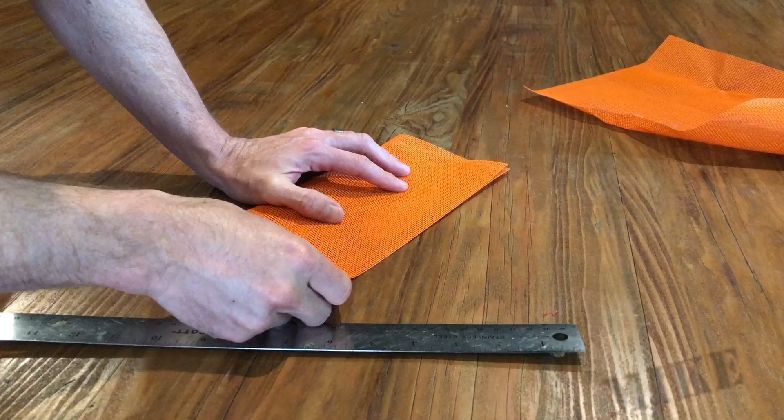These might be small enough, and with that upholstery thread and a dense enough stitch, this just might sew directly without having to put a piece of nylon tape on it. Let me go see. Okay, let's lock it off here. And I'm going to cross into this other stitch to make sure that this corner is nice and dense. And apply a lock stitch here and cut it off.

Oops. All right, that is pretty solid. So now I'm going to turn this sucker inside out, hopefully. Yeah, that's a pretty darn good stitch. Looks nice too. Okay, now the key element, of course, is the closure. What I really don't want to do is have an external stitch, but I'm probably going to have to. I don't see any way around it.

What I'll probably end up doing is folding the bag in on itself, like so, one little bit, so that the edge at least is a rounded edge, like so, and then I will sew all over all 4 layers there. Of course, the thing to do now, though, is I have to figure out exactly where to apply my closure. So I think it's time to fill it with the shot.

So I'm going to go ahead and fill it with shot and see where the shot comes up to. I've got my shot in here. I've got it patted down to the thickness I want, and I would really like it to be 7 inches long. So I'm going to mark here on this piece; this is where I want to close it up. Or where I want to fold it so that it closes. Okay, let's try this.

Okay, so then when I stand it up, you can see my shot only comes up to here, but my closure's here. So I've got plenty of room, hopefully, to sew this thing shut. Now, if I want it to be this long ultimately, my fold has to be at least a ½ inch to get under the presser foot. So I need to cut it about here. So I'm gonna do that.

All right, that folded over pretty well. The stitch is pretty darn thick. I'm not sure how that's gonna work when the needle gets to there, so I'm gonna do that area last. That way I have enough to be able to pull through and do this. Okay, to the sewing machine.

So I've got a little bit of a dilemma. How to keep the shot down near the bottom of the bag while I do this. Ideally, the needle would be right here, you know, so I could just run it along like this, and gravity would be in my favor the whole time. But it isn't. I guess I could pin it. That's what I'll do. I'm gonna run some pins here to make a temporary dam, essentially. I'll be right back. I'm gonna kind of weave them together here so that they don't...

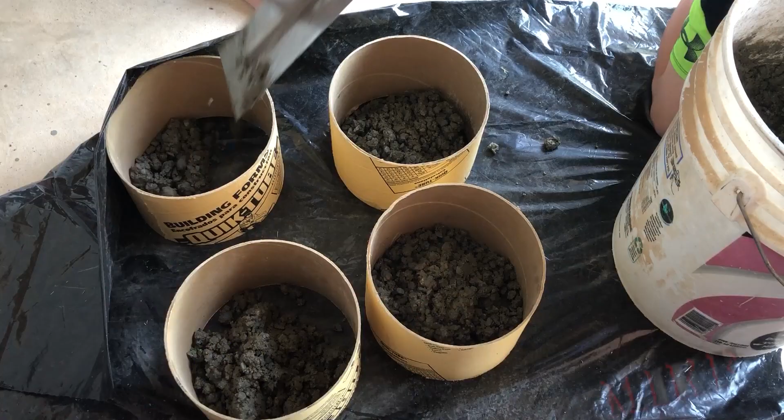And then we fill these forms that we had left over from the swing set footings. We fill them to about halfway. These are 8 inches in diameter. And then once we get them halfway, I tamp it down with this little piece of plywood I had left over. Get in every little nook and corner.

And then with these loops of wire I made, I just crossed them over themselves one time and bent the ends down about 1 inch to keep them from pulling back out of the concrete once it's set. And make sure they're centered here. Yep, this one came loose. So just loop it over itself like so. And the bent ends also keep the wire from coming undone, not only gripping the concrete, so they serve two functions.

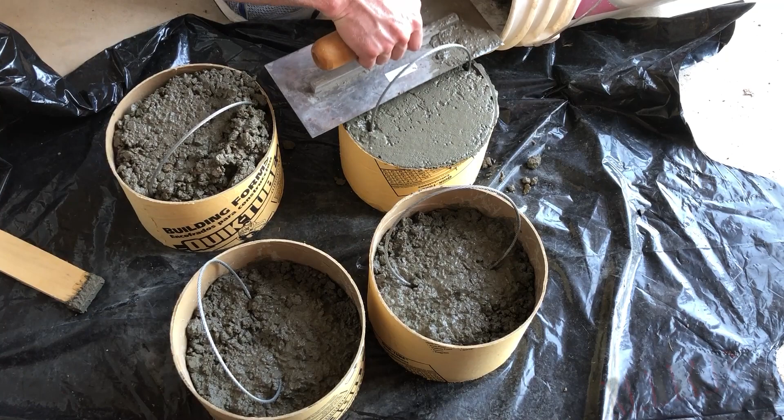And get this last one in there. And then, of course, I'll fill this up and get it all tamped down in here so that these are nice and straight and centered. And then we'll fill the whole thing with concrete. When these are done, each of these is going to weigh right at about 20 pounds. So the 80-pound bag worked out great. And then let them set up.

Still too simple, you say? All right, let's step it up another notch. How about some hard weights? 3-pound weights are kind of my bread and butter. I've got 2s and I've got a bunch of 3s. So let's make some hard weights. It is hard. That's why they're called hard weights. But check this out.

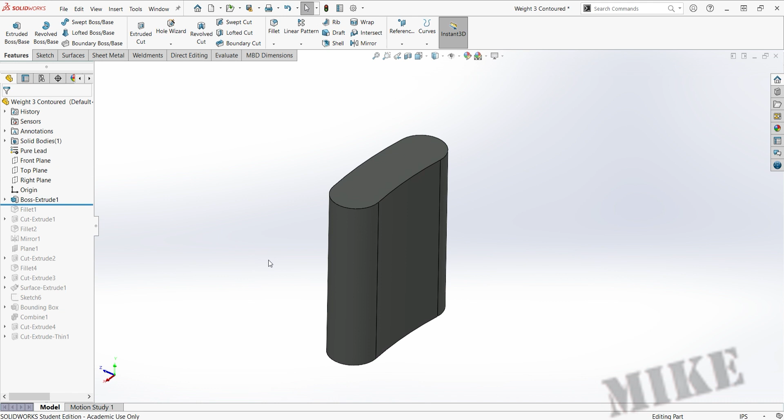So I started in SolidWorks with just this simple extrude. You can see it's just kind of a contoured, slightly concave, convex rectangle. And then I filleted all my corners, like so, make it nice and smooth. And then I did an extruded cut here on the top plane. It's a double convex lens, essentially. And kind of just like so, nothing too fancy. And then filleted that to make it nice and smooth, and mirrored it across here.

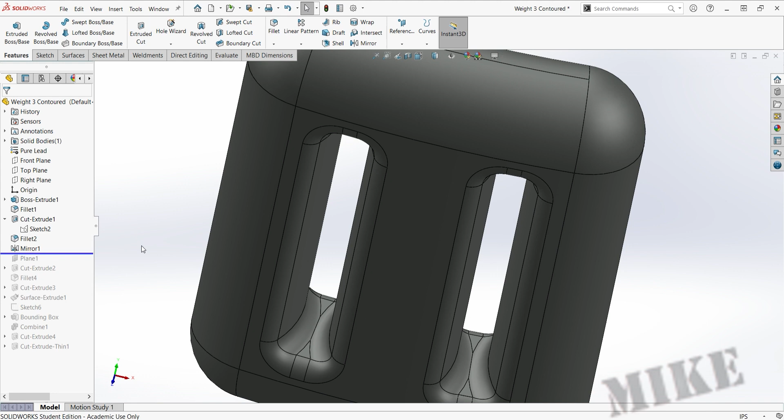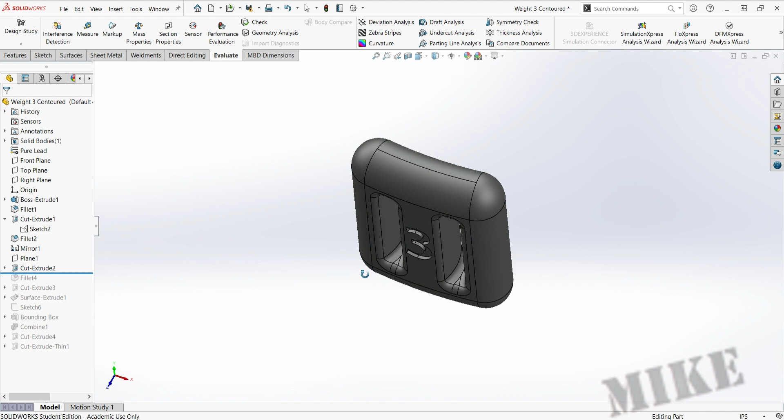And then I just played with the size of these cuts to kind of get my weight right. I went up here and evaluated the mass properties until it said 3 pounds. And of course you can see my material properties here are set to lead. Then I created this plane tangent to the front so that I could cut out this number 3 here, because all weights have their weight stamped into them.

So like so, you can see the number 3 there inset just a little ways. And then I had to fillet those corners to make them nice and smooth. Otherwise, they're not going to cast properly. Cut that little corner off there. It was a little sharp, so I had to cut that little corner in the 3.

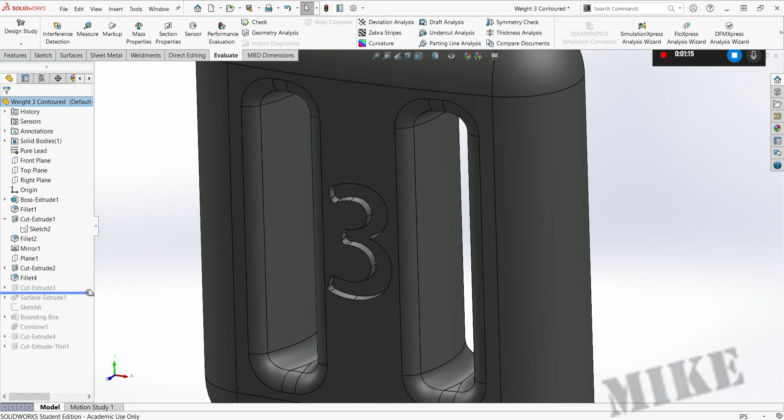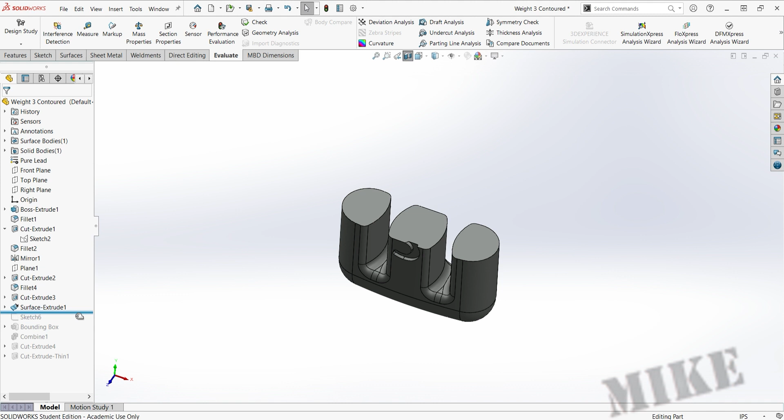And so then I extruded this surface right down through the center, because that's going to be my parting plane for my 2 halves of my mold. And if we look at it on this, you can see here, there's 1/2 of a weight. If we look at it through the middle here, this is where you can see the actual contour of the 2 slots that a belt might pass through. Now I have integrated weights, so I don't need these slots, but I put them there just in case.

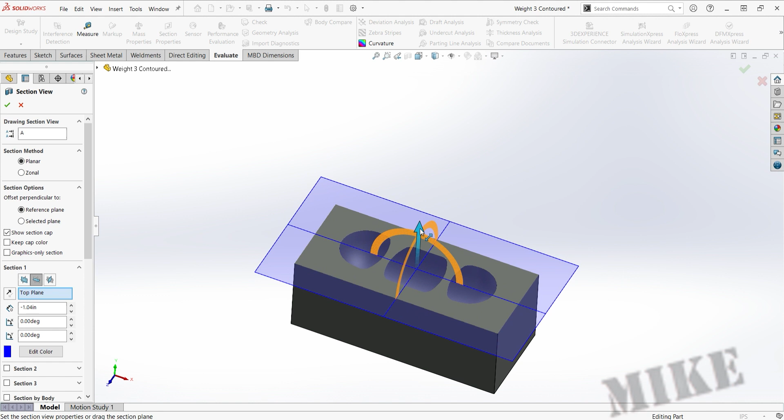And then I extruded a giant box around it. This is going to be the actual mold that I'm going to cast. And then using the combine with the subtract feature, I was able to create a cavity, like so, a negative space where my weight once was. And if you look at it here in cross-section, you can see how it goes. Looks pretty neat. If we spin it around here, we can see the 3 stamped in there, just like so. And then the slots for the weight belt stop. And then we continue on up into our block. So that's going to be that.

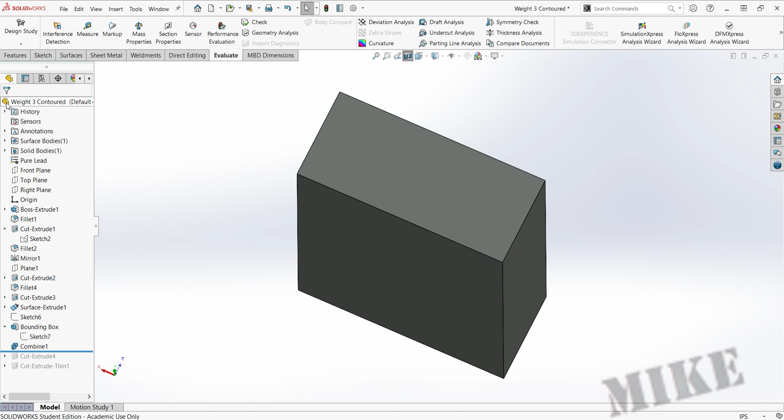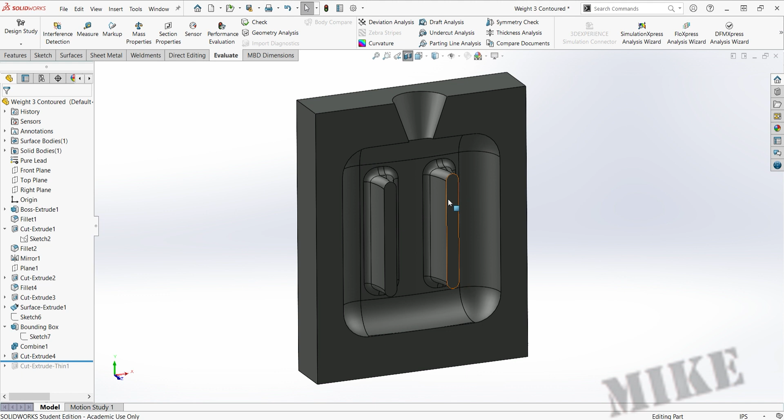But, of course, we have to separate this into 2 pieces, because otherwise we'll never be able to make it work. But we also have to allow a way to get the lead in there. So an extruded cut here for the pouring spout. We can look at it here in cross-section. So 1/2 will look just like that. Well, nearly like that. We still have to cut it to match that contour, which we'll do here in this last step. Like so. And now you can see that curved line that runs right through the center of my weight. Let's hide this, actually.

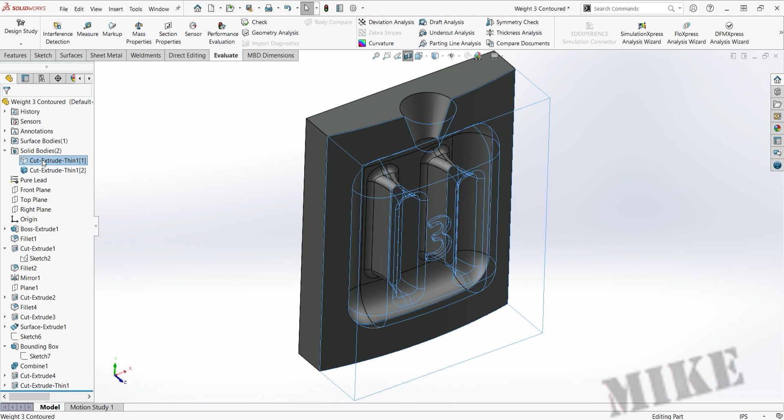So there. There's the back half of my mold. It looks just like that. There we go. And there's the front half of the mold. Pretty neat, huh? Not too many steps either. The hardest part was probably tailoring the weight just right.

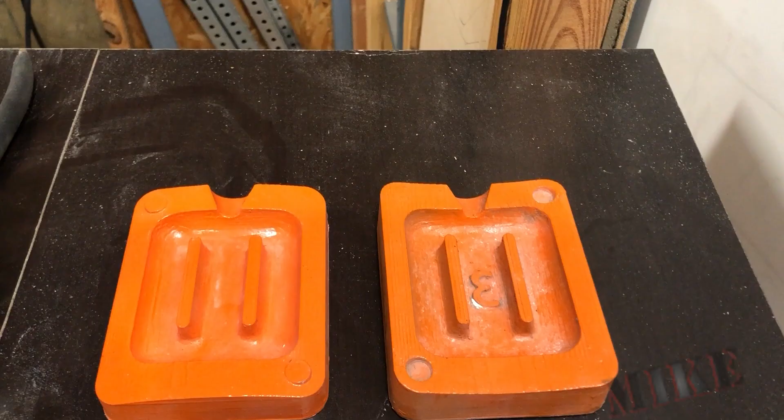And so then I 3D printed this and then painted it, filled it with some spackle, and then gave it several coats of glossy paint. And then I buried it here in one of my molds. And now I'm digging out the pouring cup and the gating. I didn't paint the back side, that's why this is still blue.

This side there, as you see, it's real shiny. That was printed on the print bed. And there's my pouring cup and my gating. This will look pretty good, I think. That screw in there helps me remove it, and time to pour. Yep.

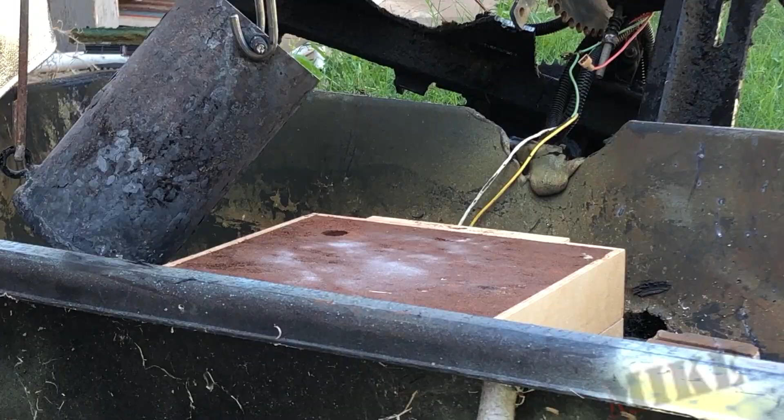All right. That is full. Now we just wait and see. Hey, look at that. Well, let's brush that sand out of there and see what that mold looks like. You can see it leaked a little bit around the side. We've got some spillage between the two mold halves, but I can just cut that off. That's no big deal. This thing's still pretty hot.

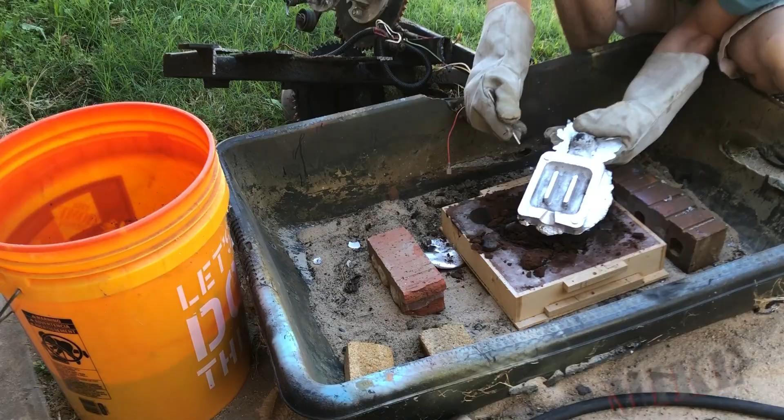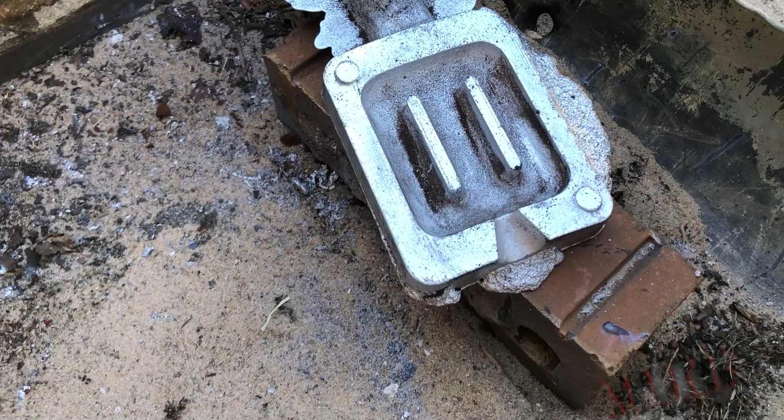Oh yeah. Just clean this up a little bit, and that's going to be nice, I think. All right. How about that? One more. And here's the other side stamped into the sand, ready to pour. And then this cover, of course, will go on top of that. All right, let's seal it up.

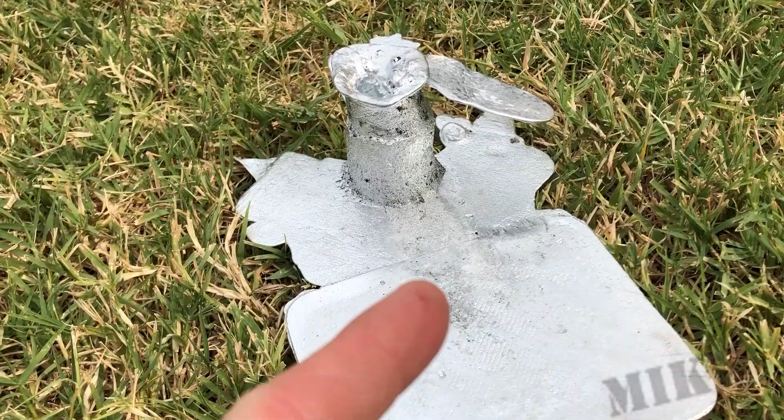This side, of course, leaked as well. I don't know why this is not sticking. The sand must have a tiny little gap in there. But we got to get that off there. You see, we just had a little bit of shrinkage on this one here. My riser wasn't quite big enough, I guess. So, oh well. It's the back side of this mold, so I don't really care. But you can see how far that shrunk down in the center there. So the riser did its job, pretty much.

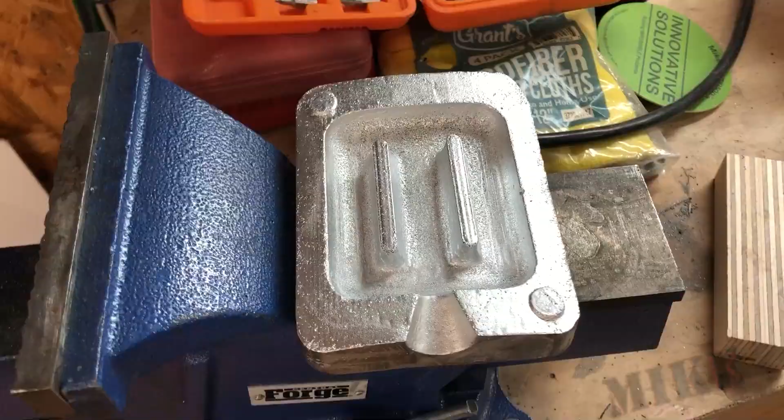Now we got to cut this off right there at that line. This riser there's not bad. And here it is all cleaned up. The back side, this one didn't have as big a riser on it, so you can see I had a massive amount of shrinkage here on the back. But I didn't really care because this is the back side of the mold. And this was the first one. The second one you saw had much less shrinkage.

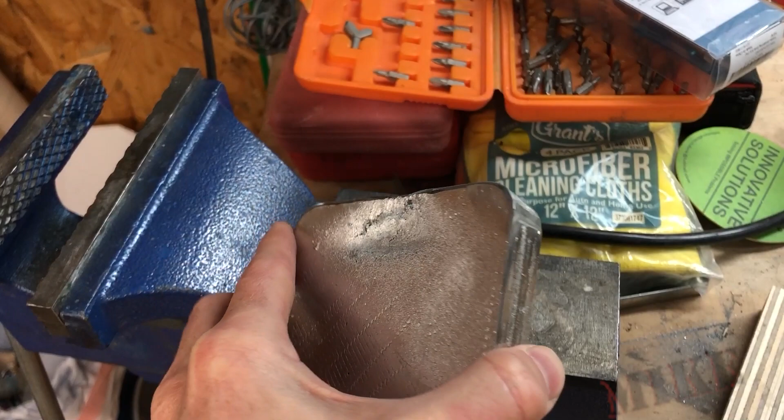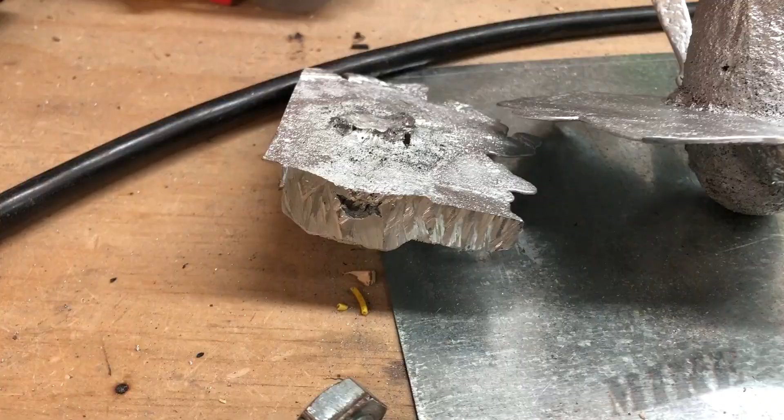I don't usually put risers unless I think I'm absolutely going to have to. And on this one I knew I really wasn't, so any bit of shrinkage on that back side where the gating is, no big deal. But look at that side. Perfect. And here are the two gates. You can see the left one's got that shrinkage cavity, whereas the one on the right side just has a tiny little pinhole size because of the riser sticking up the top there.

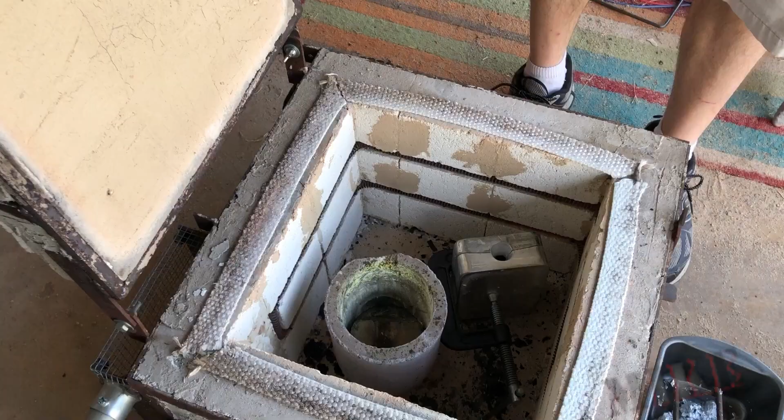Now they're all cleaned and sanded, and here they are, ready to go. You can still see some of the 3D print layers sticking through, but that shouldn't be a big deal. Now I'm going to preheat this thing along with my lead in the crucible there, because anytime you pour lead into a cold mold, you get lap joints all over the place. So hopefully this preheating worked. And I've got it in my sand here to hold the mold together and prevent any leaks that might occur.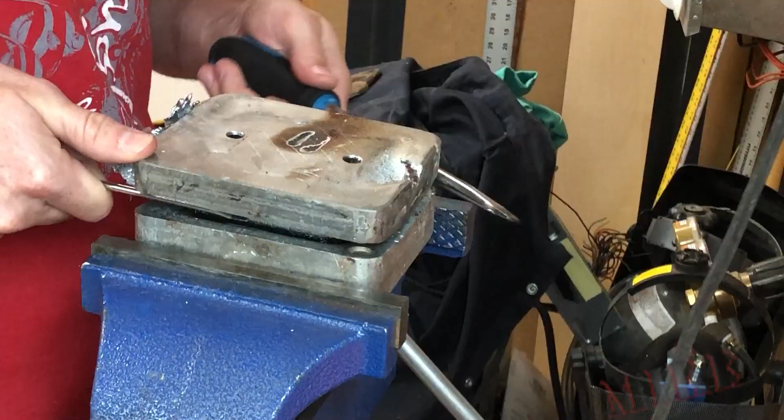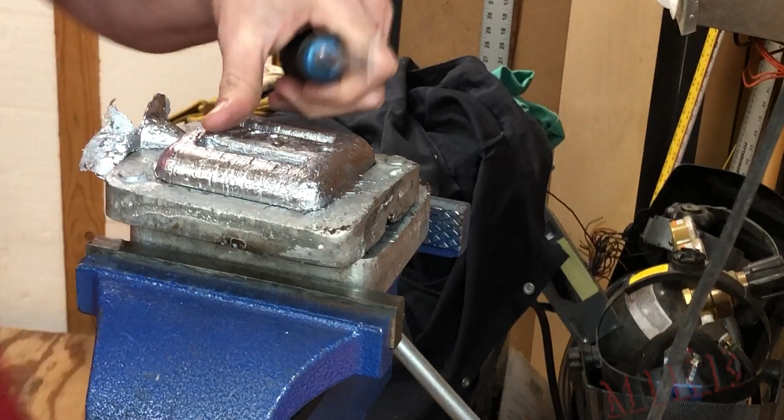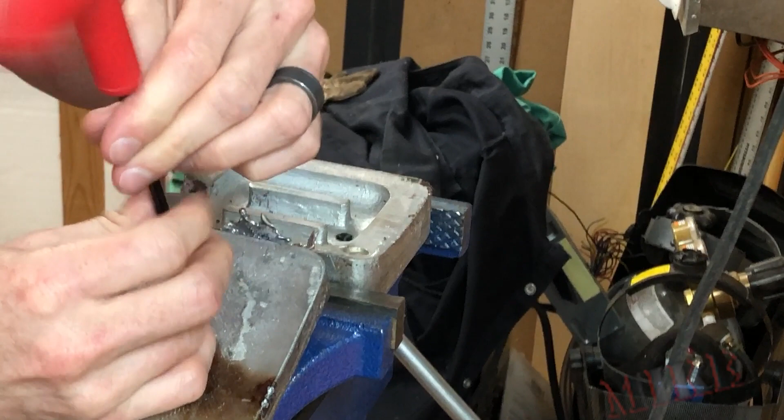Oop. Well, shoot. Okay, it's full. And moment of truth. Well, that's not bad. Look at that. I mean, yeah, it's got lap joints on the surface, but I think this is going to work. I'll clean that up. And there's the 3. How about that? That's pretty good. It's definitely a lot shinier than my old ones that are 25 years old. This, though, is lead shot, and it's got 4% antimony in it.

I did drill and tap these little set screw holes because these are how I'm going to eject the mold. You got to think ahead of how you're going to get this thing out in case it gets stuck. So I'm going to run a punch down through there and tap this thing out. Let me see if I can get this little sprue off first. Oh, it's going to break off, looks like, so can't use that to pry it out. So I will have to use my little ejection holes. Let's turn this over and we'll smack it out with this punch. Boom. There you go. Piece of cake.

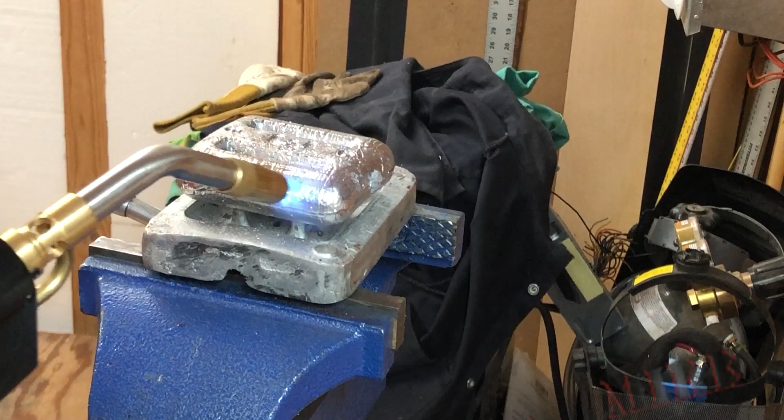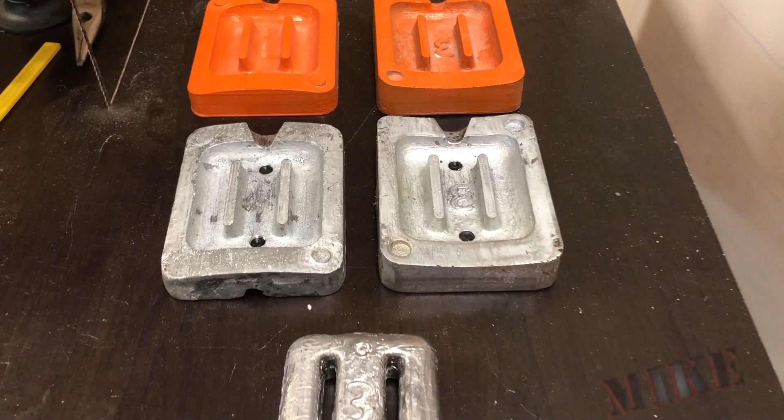And a little bit of heat should seal up that surface real nice, make it look a little prettier. Look how shiny. Wow, that gets really shiny when it starts to turn. I like that. Oop. Don't want to do it too much, or this whole thing will drip back into that mold. Well, okay. I'm happy with that. So here's the pattern, here's the mold, and here's the final piece. Not too bad, huh? And look at that. That's pretty much perfect. Time to get it wet.

So there you have it. 3 different types of weights for 3 different things. It's something you can probably do yourself, especially the soft weight and the concrete weight. Just don't be afraid to try.